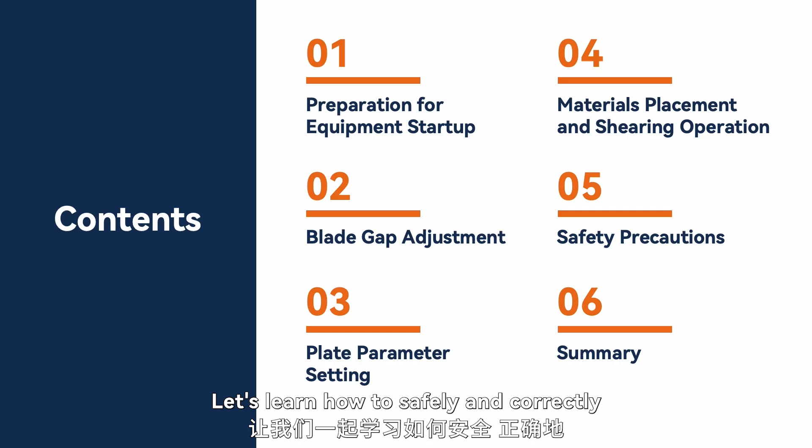Next, we will study the relevant content of shearing blanking operations together. I'm Zhang Wei. The plate shearing machine is a common piece of equipment in mechanical processing, and standardized operation is crucial. Let's learn how to safely and correctly use the plate shearing machine for shearing blanking.

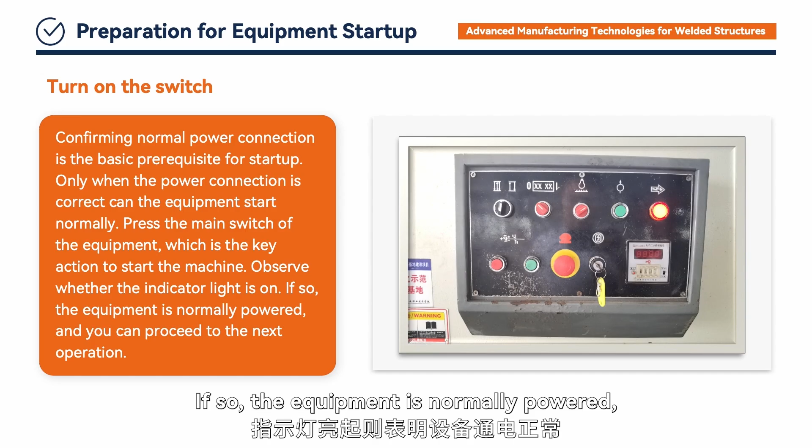First, prepare for equipment startup. Confirming normal power connection is the basic prerequisite for startup. Only when the power connection is correct can the equipment start normally. Press the main switch of the equipment, which is the key action to start the machine. Observe whether the indicator light is on. If so, the equipment is normally powered, and you can proceed to the next operation.

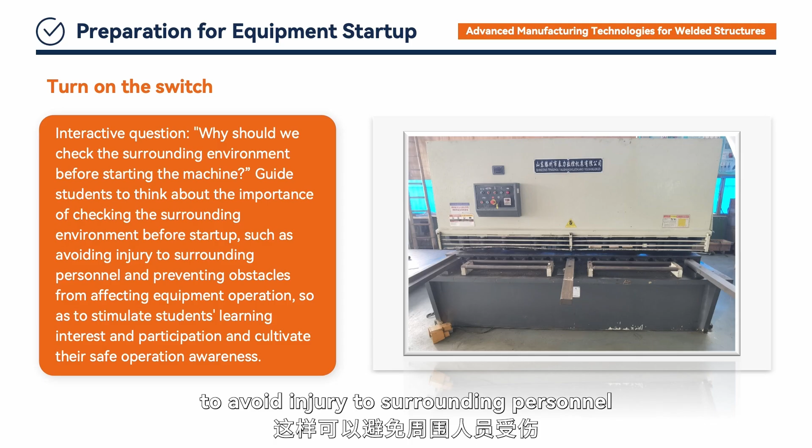Checking the surrounding environment before startup is very important to avoid injury to surrounding personnel and to prevent obstacles from affecting equipment operation. Next is the core operation, blade gap adjustment. When the plate shearing machine shears plates of different thicknesses, the blade gap needs to be accurately adjusted to ensure shearing quality and equipment safety. We need to adjust the gap according to the tensile strength of the plate. The higher the strength, the larger the gap.

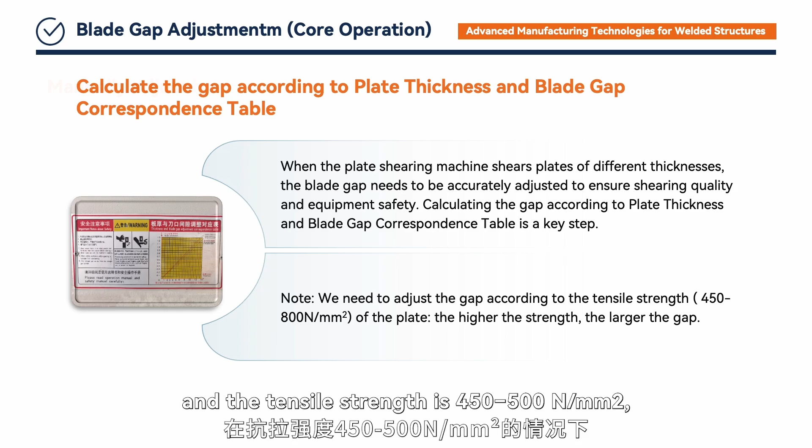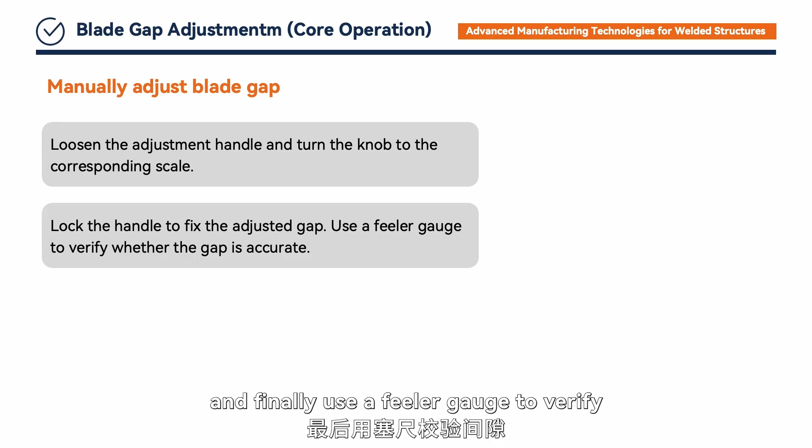Calculating the gap according to the plate thickness and blade gap correspondence table is a key step. For example, when the plate thickness is 1 millimeter and the tensile strength is 450 to 500 newtons per square millimeter, the blade gap should be 0.2 millimeters. During operation, first loosen the adjustment handle, turn the knob to the corresponding scale, then lock the handle to fix the adjusted gap, and finally use a feeler gauge to verify whether the gap is accurate. Special attention: uncalibrated gaps will cause burrs on the plate or damage to the blade. Everyone must be rigorous and meticulous.

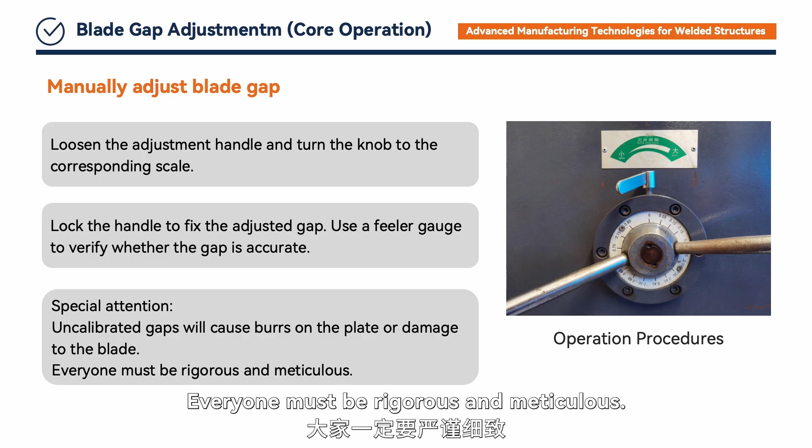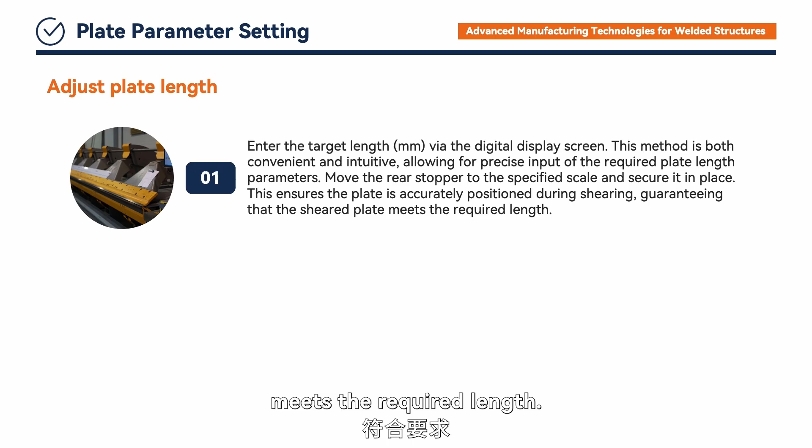Now proceed with the plate parameter settings. Enter the target length via the digital display screen. This method is both convenient and intuitive, allowing for precise input of the required plate length parameters. Next, move the rear stopper to the specified scale and secure it in place. This ensures the plate is accurately positioned during shearing, guaranteeing that the sheared plate meets the required length. In practice, it's crucial to set parameters accurately and double-check them to prevent material waste due to length discrepancies.

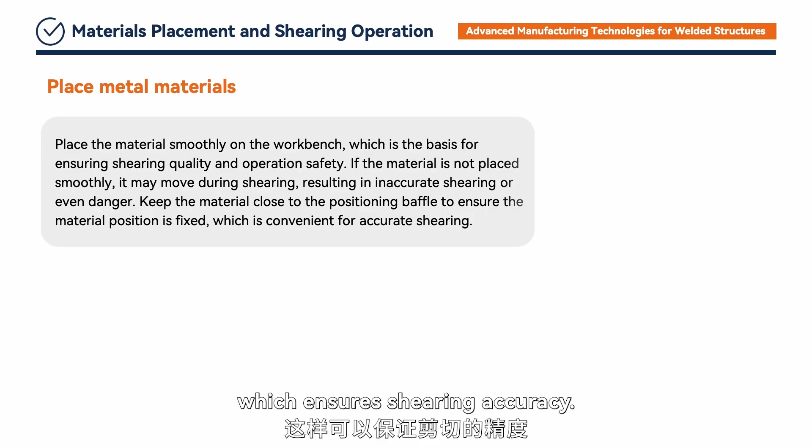For material placement and shearing operations, first, place the material smoothly on the workbench, close to the positioning stopper. Ensure the material is securely positioned and hold it firmly with both hands to align the edge with the blade, which ensures shearing accuracy. Note, handling overweight plates alone is prohibited. Two-person cooperation is required to avoid physical injury. Confirm that both hands are completely clear of the blade area, which is essential for personal safety. Step on the foot switch at a steady pace and release it immediately after shearing to ensure a smooth shearing process and prevent quality issues or misoperations.

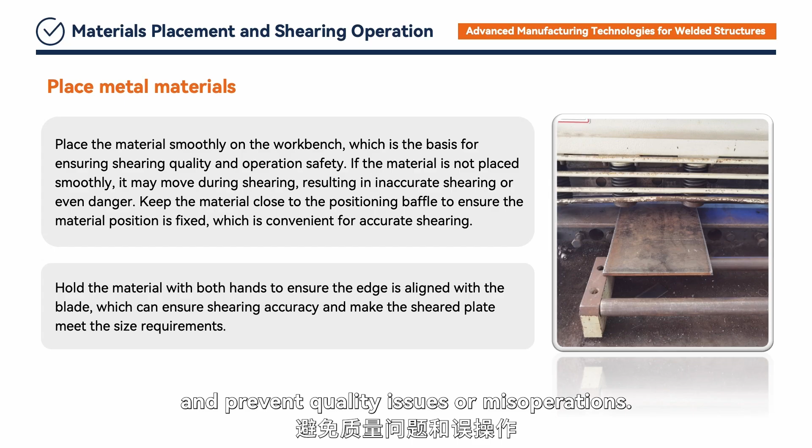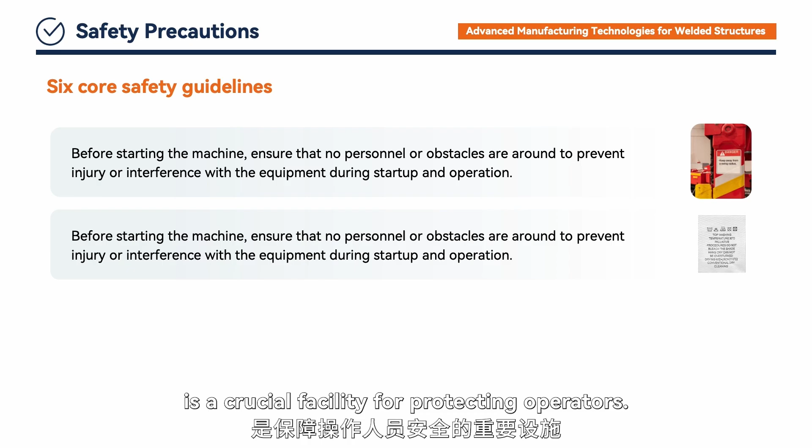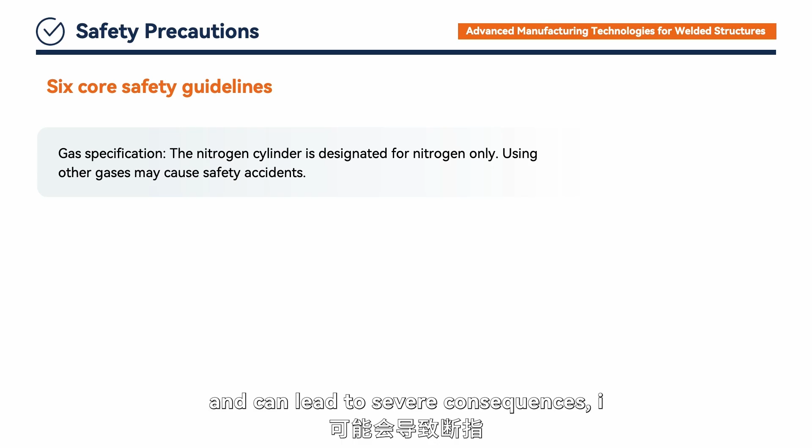Safety precautions are of paramount importance. Before starting the machine, ensure that no personnel or obstacles are around to prevent injury or interference with the equipment during startup and operation. The safety guardrail is a crucial facility for protecting operators. Disassembling it is strictly prohibited, as it exposes operators to danger. Fingers must never be placed below the blade or the material pressing foot, as this is extremely dangerous and can lead to severe consequences, including finger amputation.

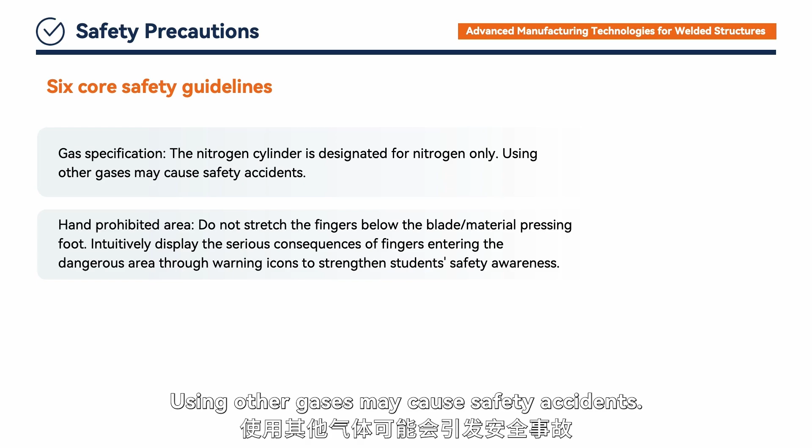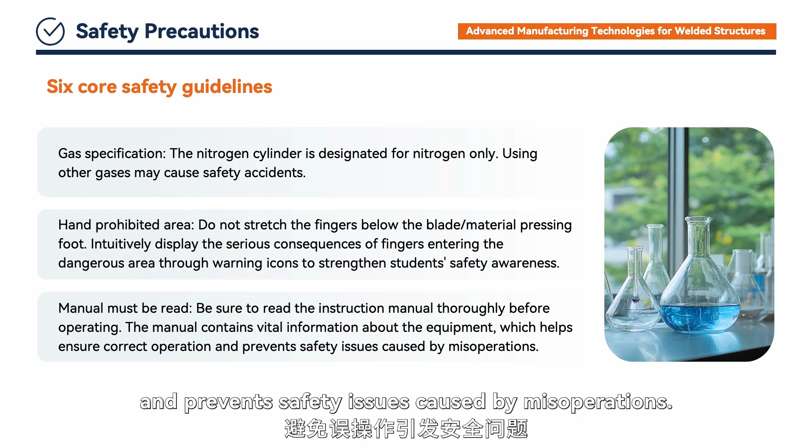During shearing, the thickness and strength of the material must not exceed the equipment's rated parameters, which are clearly marked on the equipment nameplate. Please check carefully. The nitrogen cylinder is designated for nitrogen only. Using other gases may cause safety accidents. Be sure to read the instruction manual thoroughly before operating. The manual contains vital information about the equipment, which helps ensure correct operation and prevents safety issues caused by misoperations.

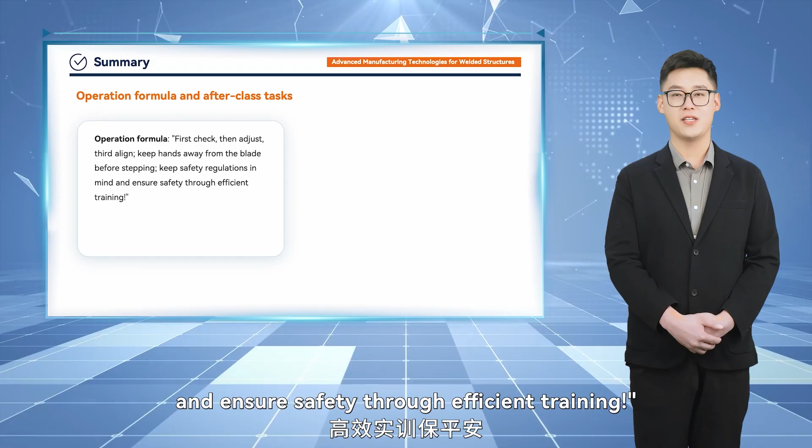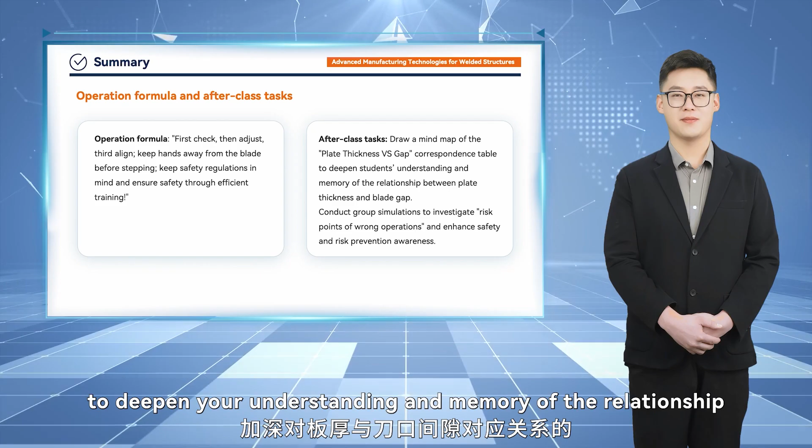Finally, let's summarize. The operation formula can help you quickly master the key steps and safety points. First check, then adjust. Third, align. Keep hands away from the blade before stepping. Keep safety regulations in mind and ensure safety through efficient training. After class, please draw a mind map of the plate thickness versus gap correspondence table to deepen your understanding and memory of the relationship between plate thickness and blade gap. You should also conduct group simulations to investigate risk points of wrong operations and enhance safety and risk prevention awareness.

Thank you for watching. I hope that through this study, you can proficiently master the safe operating procedures of the plate shearing machine and always prioritize safety in both training and work.